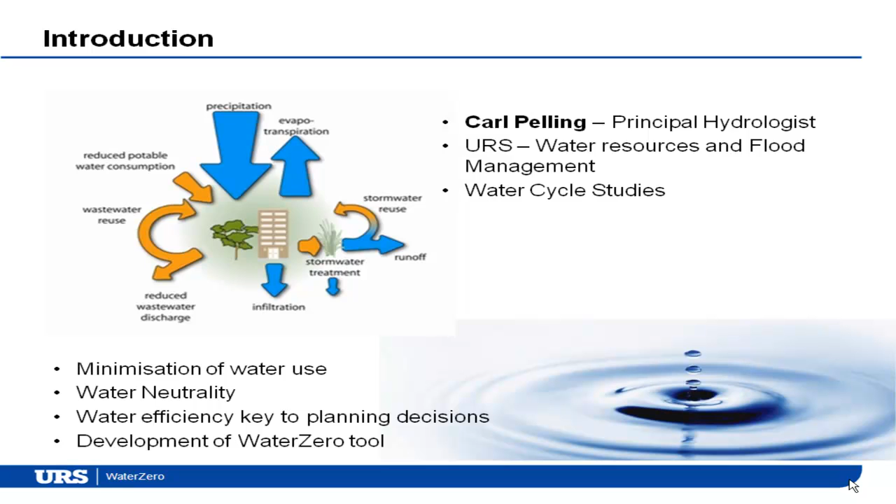I just wanted to talk a little bit about the drivers behind the need for water efficiency. You're probably well aware of most of them, but it's still worth recapping why water efficiency is important for development. I think the current drought that's ongoing in the southeast and east of England demonstrates that there are finite resources in the UK.

We can't continue to keep abstracting from the rivers and aquifers that we have. There are limited amounts of water at certain times in the year. And with the growing population that's planned over the next 20 years, we could be seeing an extra 10 million customers drawing on the same resources that are currently struggling as we stand now.

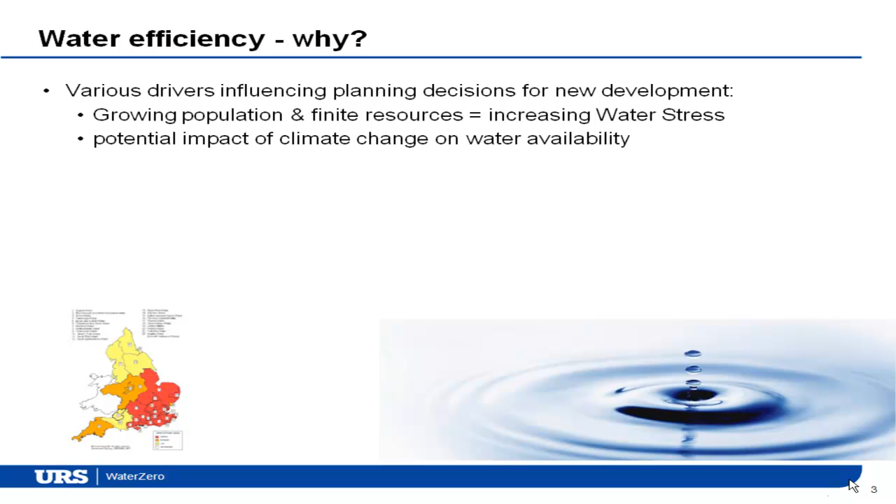As previously mentioned, Chris was talking about the potential impact of climate change on water availability. The predictions are that the summers are going to be drier and there's going to be less rainfall during the summer months, which means droughts are going to be more likely in probability.

There is a lot of variation in local planning policy about what water efficiency targets developers should be considering, and that's specifically changed recently with the move away from national planning policy guidance and the removal of the regional spatial strategies, which puts a lot more emphasis on local planning authorities deciding what their efficiency targets should be for development.

Also, the Environment Agency are keen to look at the water cycle study approach at more development level. So rather than just looking at growth across a district, they're quite keen for very large developments to consider how water can be managed holistically on a whole site basis.

And then there's the requirements of the Water Framework Directive. The amount of water that we use has an impact both on the quantity targets of the Water Framework Directive, but also quality in terms of the amount of wastewater that's generated from water use.

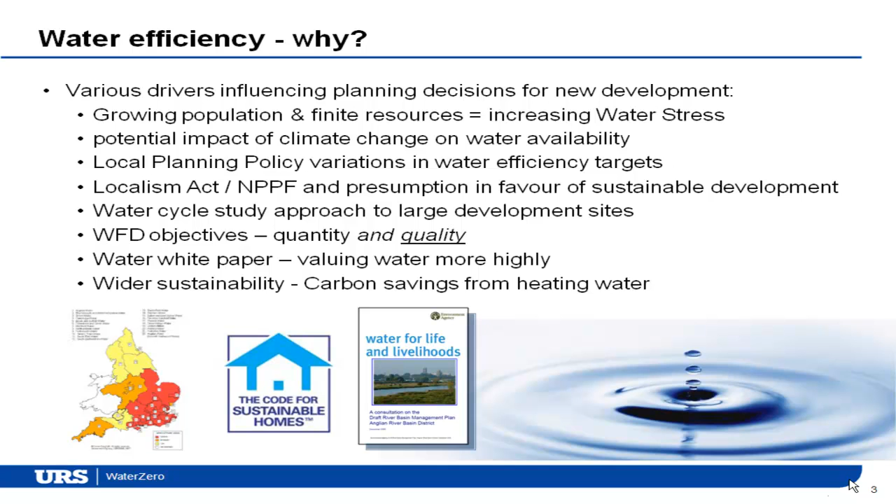And then there are drivers looking at wider sustainability. People using less water means less carbon's used in heating water, for instance. And the Water White Paper is looking to put more value on water and how much it costs to actually use water, to be more relevant to how much it costs to produce it for people to use.

So we've completed over 30 district-wide water cycle studies. And as I mentioned in the last slide, there are two key issues coming out of it, and that's quantity and quality of water.

Quite a lot of the local growth aspirations we've been looking at are well in excess of what the water companies have been planning for in their statutory water resource management plans, which they do over 25 years. The targets that water companies have been planning for are quite often lower than what local authorities are driving to propose. What that creates is a reduction or deficit in the amount of water available for local planning authorities in their growth area, which makes it quite difficult for them to prove that development is sustainable and can be delivered in that time frame.

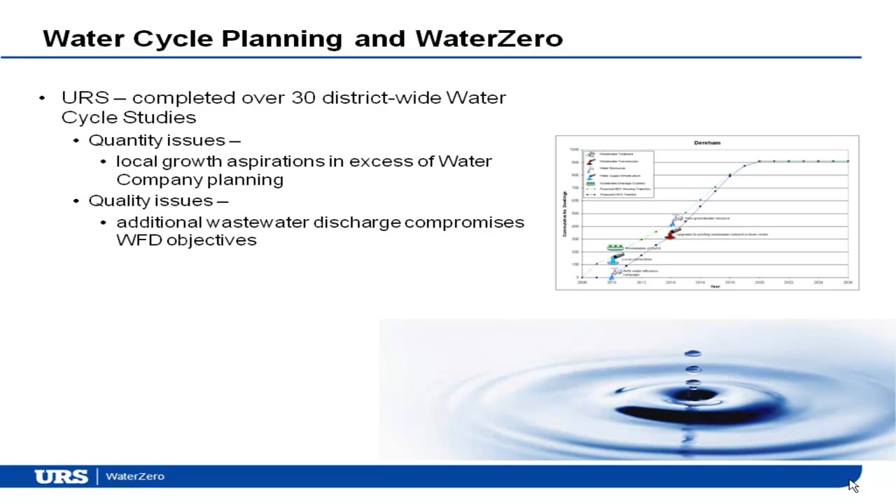Then one of the other biggest issues is quality. The use of more water means more wastewater needs to be discharged to the environment, and it's quite common that where there are current water quality issues is where there's also water stress. So the more water that's used in those areas means there's going to be a greater impact on the water quality from those discharges.

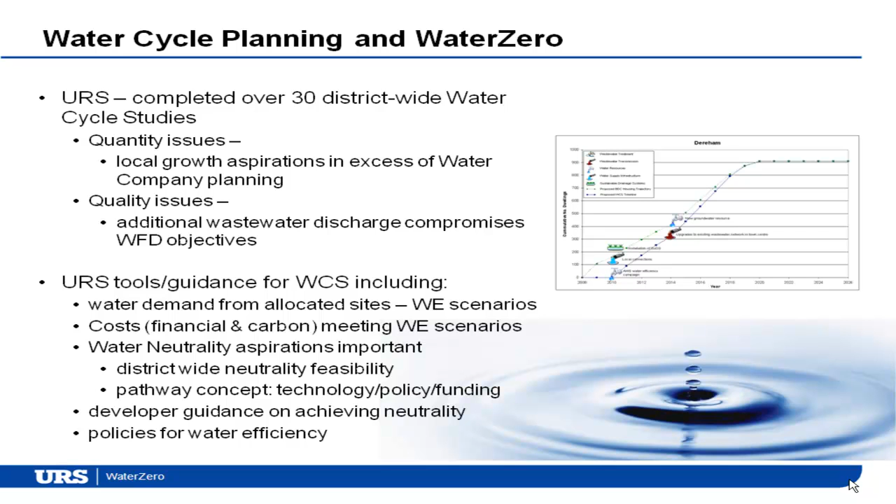So URS has been developing several tools for these water cycle studies that look at calculating water demand from allocated sites, looking at the cost, both financial and carbon, of delivering those water efficiency scenarios, looking at how achievable water neutrality might be in the future - I'll come on to that in the next slide - and setting out guidance for developers on how they can achieve neutrality and reduce water use in their developments.

So what is water neutrality? It's basically a high-level planning aspiration to ensure that there is enough water to support new development without requiring additional water resources. In theory, it's quite similar to carbon neutrality, the idea being that the amount of water used by new development can be offset by reducing the amount of water that current properties use.

So the Environment Agency's full definition is that for every new development, total water use across the wider area after the development must be equal or less than it was before that development took place. So the idea is you reduce the amount of water the new development uses as far as you can, and where there's still an increase, which there always will be, you try to offset that through existing development, through retrofitting of water efficiency.

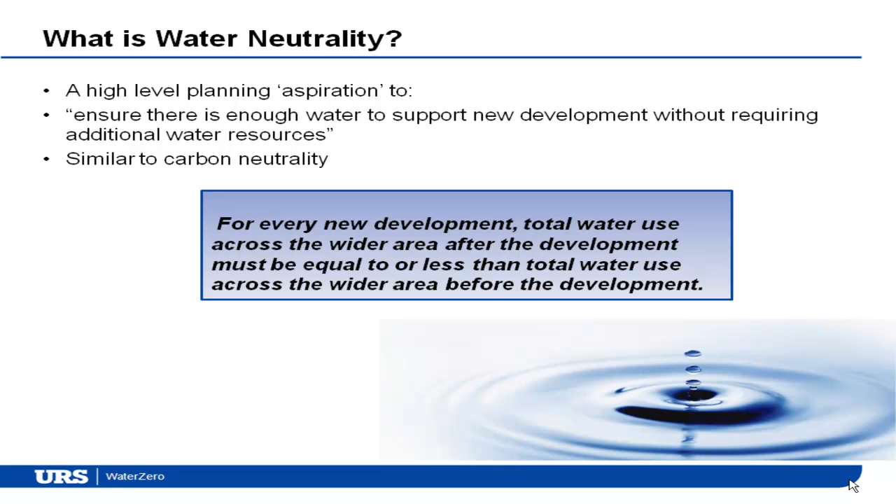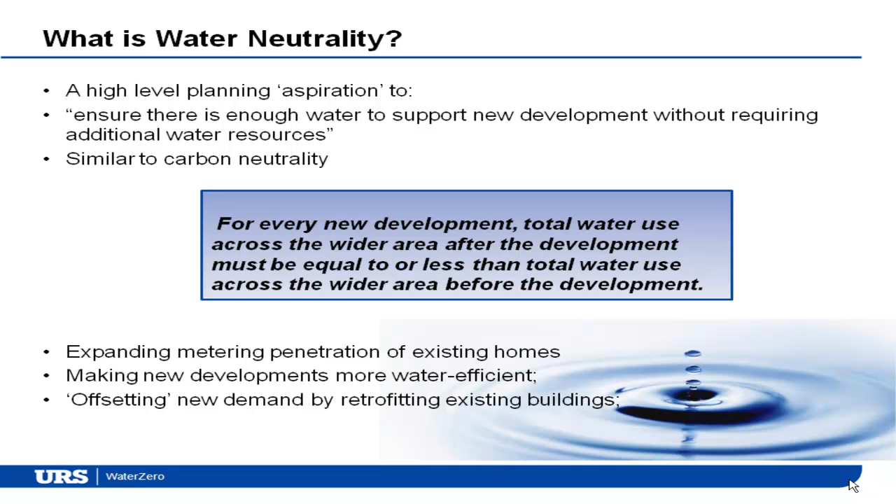As I mentioned, the ways to do that really are to make new developments as water efficient as possible, for water companies to extend their metering programme to 100% where possible, and then offsetting the new demand from existing properties.

So URS has developed the WaterZero concept, and it's one of several research and development sustainability tools that we've developed over the last 2 years. It has consolidated all the tools that we've been developing with local authorities and the Environment Agency to assess water efficiency.

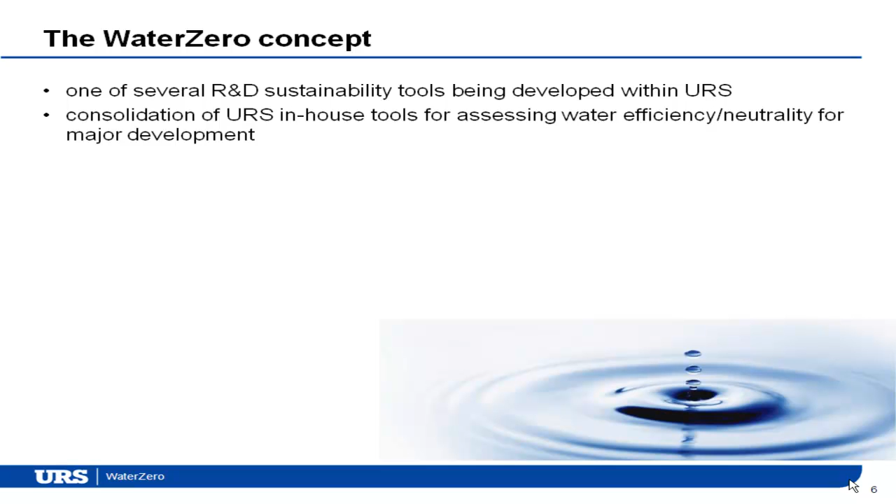It's a tool in development - I'm keen to point that message out. But the phase 1 that we've developed is really a planning tool for local authorities to consider using, for the Environment Agency to use, to assess whether water efficiency is actually going to be deliverable at the levels they're talking about, and to assess whether water neutrality is even feasible in certain areas.

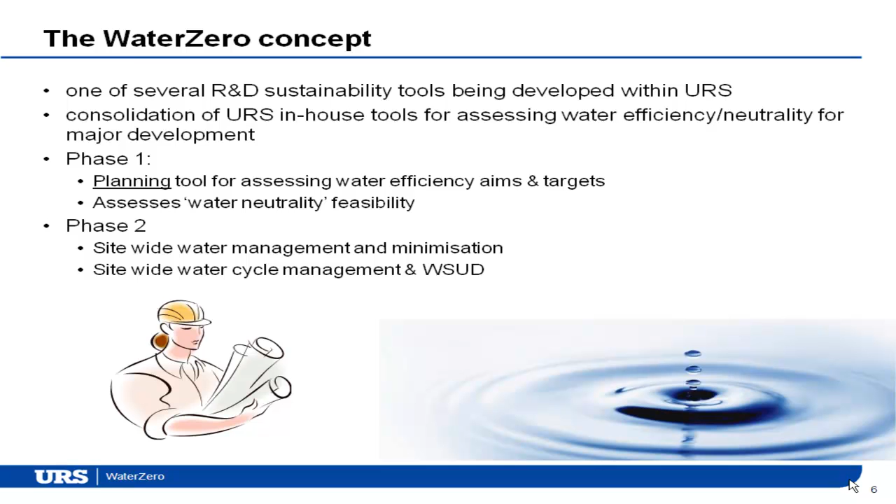So by inputting data into the tool, either at a district level or at site level, the tool will then tell you what water stress classification your development is in, giving you an idea of what the drivers are from the Environment Agency's perspective for reducing water use. It calculates the amount of water your development would use over the 25-year growth plan and determines the effect of water savings from policies that may be put forward.

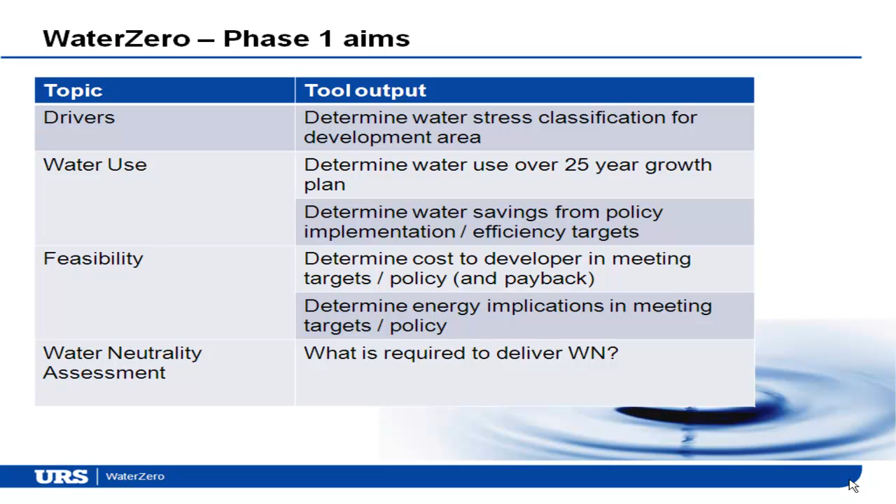It determines the cost to the developer in delivering that level of water efficiency and the amount of carbon that would be used in that process. And it also gives the assessment of whether water neutrality is feasible or not.

So to give you an idea of what the tool looks like, this is the interface. When you input the data into the tool, it tells you which water company you would be served by from that development, and it allows you to input the targets in terms of water efficiency you think your development should achieve.

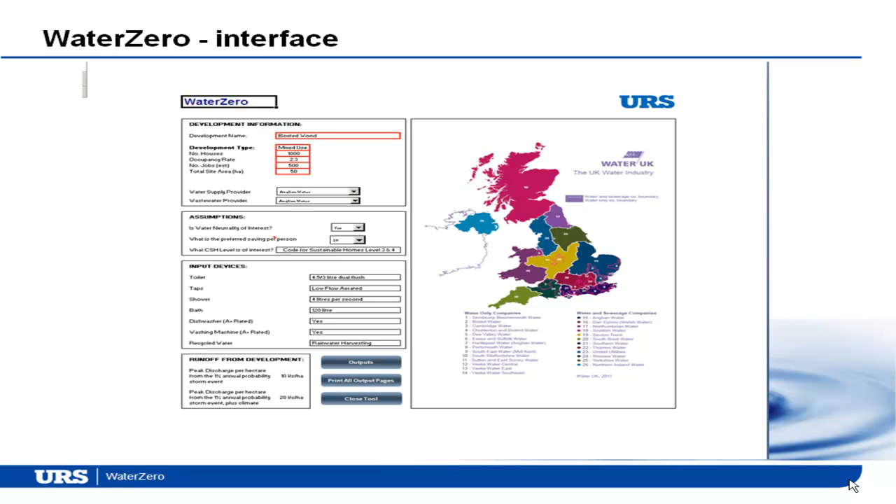It's very important for local authorities to consider this, because they quite often put forward very strict requirements on developers to reduce water use as far as they can, looking at code levels 5 and 6, for instance, in the Code for Sustainable Homes. This obviously has quite large cost implications for developers who have competing requirements on development and sustainability.

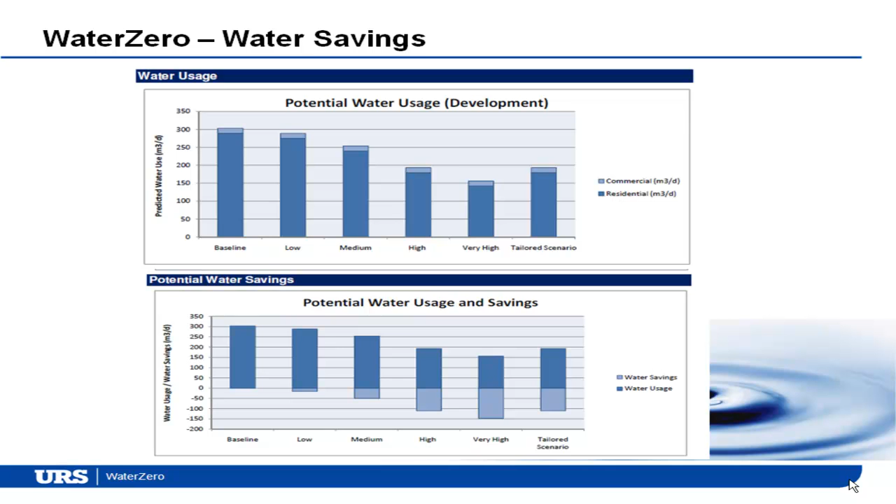So the tool gives you, across a range of scenarios we've developed, how much water your development would use over that period. Then, by implementing a selection of different water efficiency devices, it shows how much water you may save across each different area of water use. It can give the developer an idea of which code level they would reach through implementing different water efficiency levels.

So working across the diagram, you've got the baseline using existing building regulation minimum requirements, and then moving through a range of more and more efficient scenarios, towards the very high scenario, which introduces grey water recycling and rainwater harvesting into major development. The final bar chart is a tailored scenario where you can pick exactly which efficiency devices you would like to include in your development.

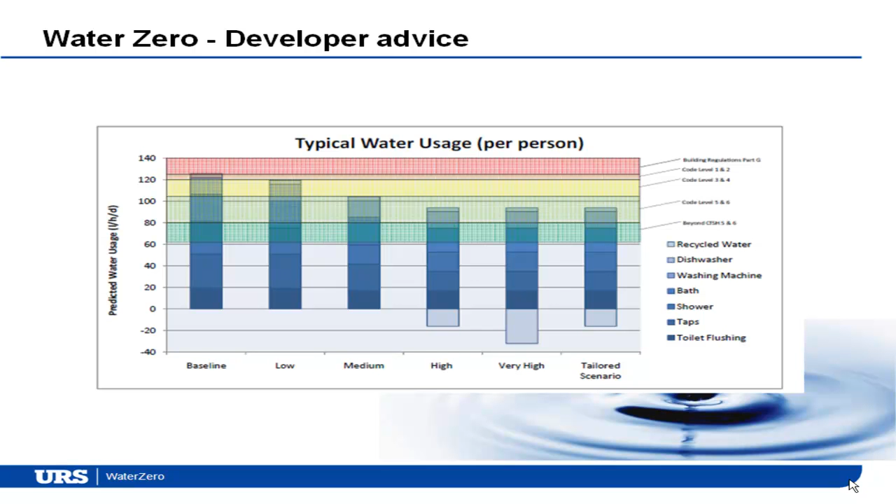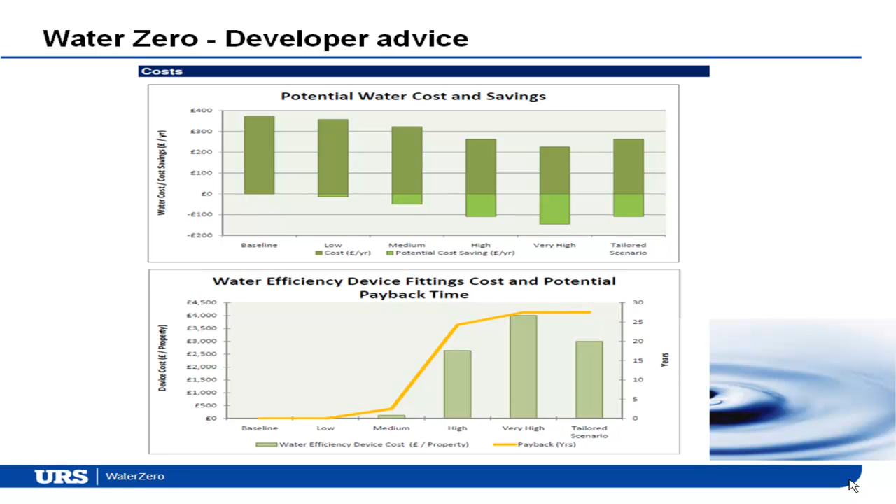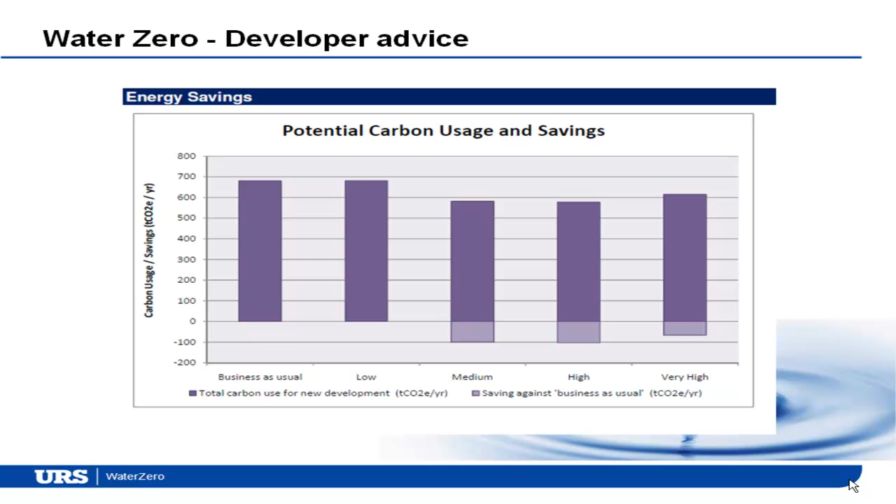For local authorities, this water neutrality feasibility assessment gives planners an idea of how many existing homes would need to be retrofitted with water efficient devices to make up for the increase that new development would have over the plan period. It also gives an idea of how close you could get to neutrality if you introduce higher and higher amounts of efficiency.

So it's a planning tool really to give local authorities an idea of whether water neutrality could be achieved or not. It also outputs a range of potential policy recommendations that they can set on developers in terms of their targets for water efficiency.

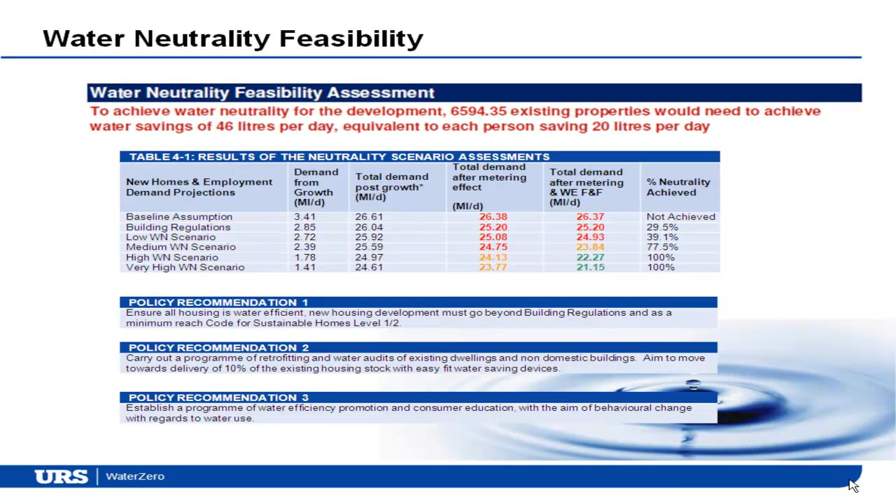So just summarising where we'd like the tool to be going, we're aware that water efficiency is only one part of the message, and there needs to be consideration for very large developments about site-wide water management and how you can manage rainwater runoff with potential reuse on a site. This introduces the concept of water sensitive urban design, which is very big in America and Australia, and it's something that's starting to come to the fore in the UK, and something the Environment Agency are very keen on promoting when considering large developments.